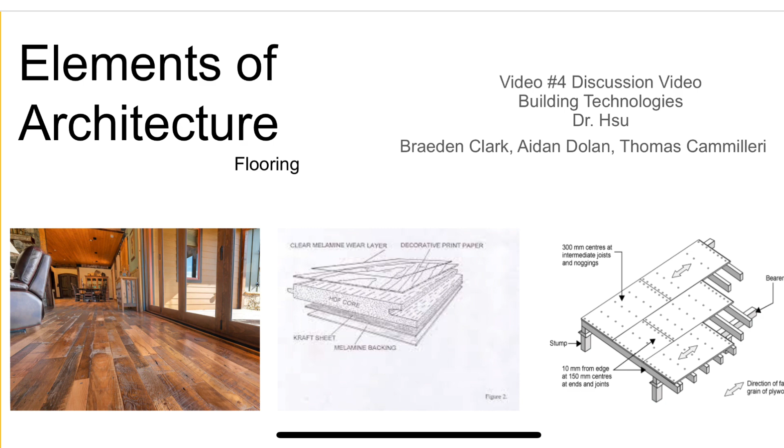One of the important aspects to mention is the practical and symbolic importance of flooring. The floor serves as the foundation of a building that provides a stable and level surface for people to walk on. The construction of the floor is critical to ensuring that a space is safe, functional, and comfortable. For example, the floor must be strong enough to support the weight of people and objects. It must also be able to withstand wear and tear over time.

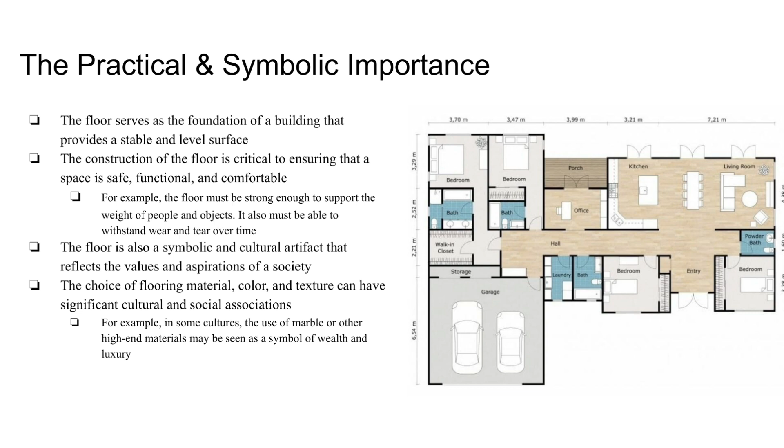The floor is also a symbolic and cultural artifact that reflects the values and aspirations of a society. The choice of flooring material, color, and texture can have significant cultural and social associations. For example, in some cultures, the use of marble or other high-end materials may be seen as a symbol of wealth and luxury.

Another very important aspect is the material chosen for flooring. The flooring material can have a significant impact on the overall look and feel of a space. Different flooring materials have different visual and tactile qualities and can create a wide range of aesthetic effects. For example, a polished concrete floor can give a space an industrial, modern feel, while a hardwood floor can create a warm and inviting atmosphere.

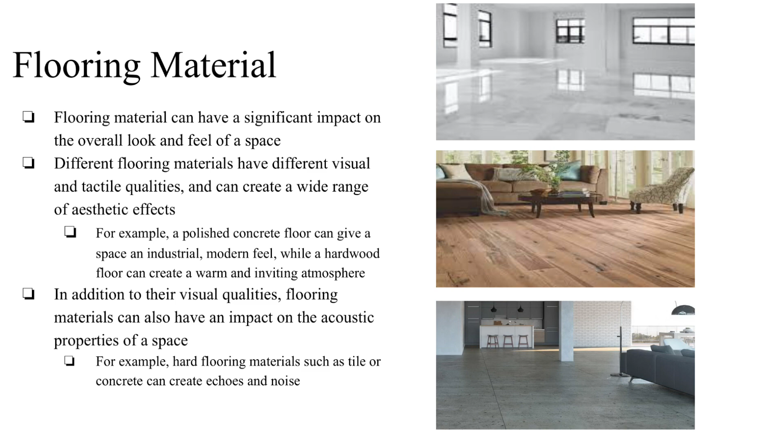In addition to their visual qualities, flooring materials can also have an impact on the acoustic properties of a space. For example, hard flooring materials such as tile or concrete can create echoes and noise. Over the years, flooring materials have evolved greatly. The invention of linoleum in the mid-19th century provided a durable and easy-to-clean alternative to traditional flooring materials such as wood and stone. The development of synthetic materials such as vinyl and rubber in the 20th century created new possibilities for flooring design and installation.

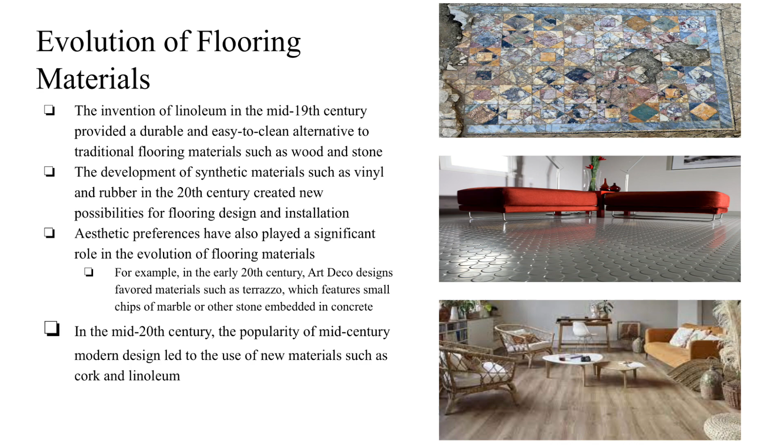Aesthetic preferences have also played a significant role in the evolution of flooring materials. For example, in the 20th century, Art Deco designs favored materials such as terrazzo, which features small chips of marble or other stone embedded in concrete. In the mid-20th century, the popularity of mid-century modern design led to the use of new materials such as cork and linoleum.

One of the very important aspects when choosing a flooring material is the sound that each material creates. Wood, for example, tends to produce a creaking sound, especially when it begins to age. A floor with a smooth surface tends to squeak when stepped on, especially when wet. For centuries, people have been attempting to create a sound deadening technology. Some of the earlier technologies used included reeds, twigs, mortar, cockle shells, paper, and felt. These could be placed under and between wood panels that produced unwanted sound.

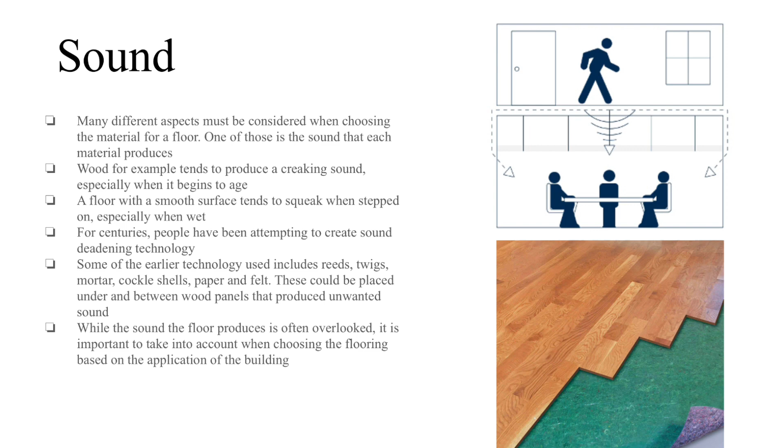While the sound the floor produces is often overlooked, it is very important to take into account when choosing the flooring based on the application of the building. Another extremely important aspect to consider when flooring a house is what type of finish is required. There are many different types of finishes for all types of flooring. One of the most popular finishes for wood flooring is polyurethane. It can handle high foot traffic and is resistant to almost any type of liquid.

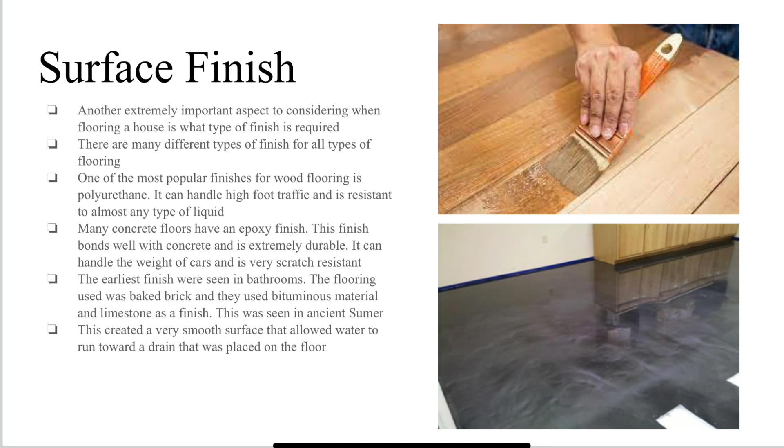Many concrete floors have an epoxy finish. This finish bonds well with concrete and is extremely durable. It can handle the weight of cars and is very scratch resistant. The earliest finishes were seen in bathrooms. The flooring used was baked brick, and they used bituminous material and limestone as a finish. This was seen in ancient Sumer. This created a very smooth surface that allowed water to run toward a drain that was placed on the floor.

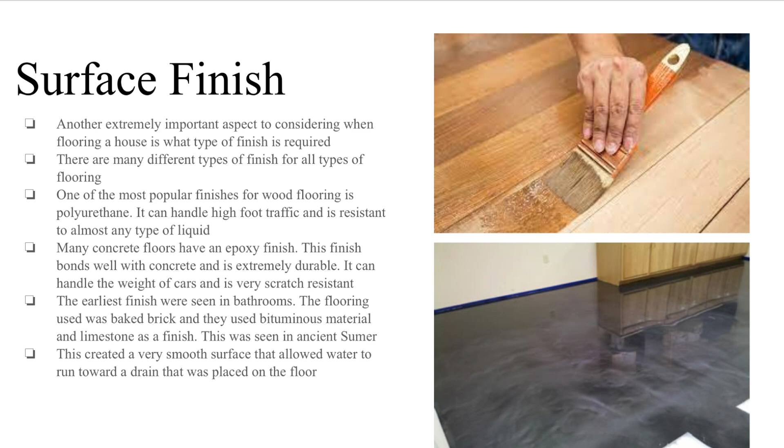Another important feature of flooring is statics. Laying down flooring is not as straightforward as it may seem. One must consider the load carrying capacities of the floors. This mathematical calculation is known as statics. This is most often applied to industrial buildings that are designed to have many occupants at once. The floors for these buildings are designed to handle around 7 bar or 101 pounds per square inch. Residential buildings typically are built to handle half of that amount.

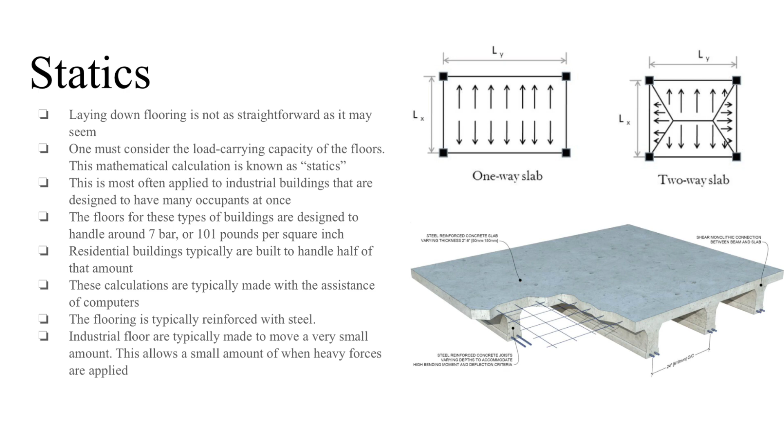These calculations are typically made with the assistance of computers. The flooring is typically reinforced with steel. Industrial floors are typically made to move a very small amount. This allows a small amount of give when heavy forces are applied.

How can flooring create spatial hierarchies? One way that this could happen is by varying the flooring material or pattern in different areas of space. An example of this may include marble flooring in the entrance of a building, which can create a feeling of importance. In this way, the floor can be used to guide people through a space and to create a sense of hierarchy and order. Color can also be used to create a sense of hierarchy on the floor. A dark colored floor may create a sense of depth and importance, while a lighter colored floor may make a space feel more open and airy.

Rem Koolhaas was a very important architect of the 21st century. He was an architect as well as a scriptwriter. He created the Exodus, or the Voluntary Prisoners of Architecture, in 1972. Everyone was leaving cities for suburbs, so this was an attempt to draw people back to cities that had deteriorated and emptied out over time. His design consisted of two main walls, then individual sections dividing the area inside those walls, as seen in the images to the right. He also used squares to keep his design simplistic and uniform throughout, which can also be seen in the images to the right.

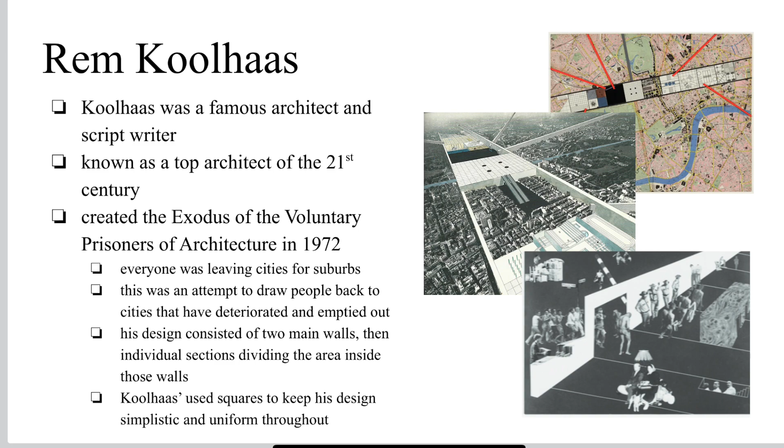A very important design in the 1900s was the Continuous Monument. It was designed by Superstudio in 1969. This model showed a model of total urbanization. It pushed the extreme of the classical relationship between nature and architecture, and this idea was striving for utopia. It takes to the limit the modern distinction between natural and artificial, as well as opens new ways for a hybrid philosophy of reconstructing the relationship between architecture and nature.